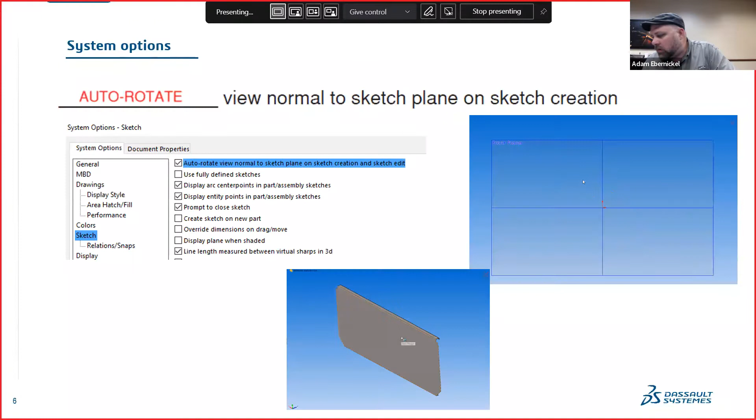The second thing we can do, the numeric input on entity creation, so enable that on screen, and you can see some of these GIFs I've got loaded up and where that's actually at. I'm sorry, we're going to go through this one and then go to the next one, I jumped ahead. So you can see the GIFs.

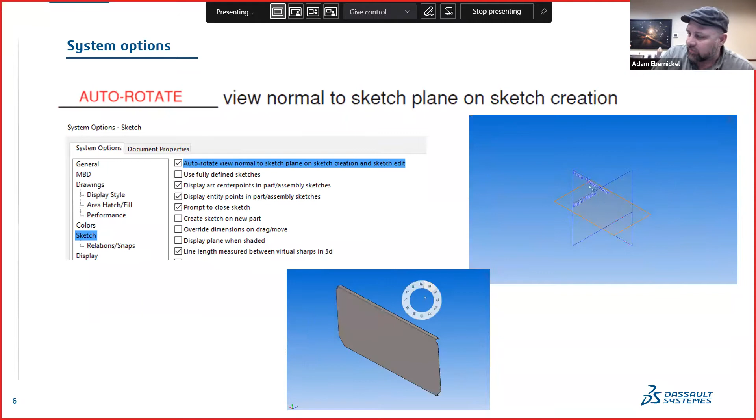Basically what you do is go into the system options, go to sketch, and you'll see the location I've got highlighted blue there. You check that off. What that does is anytime you pick on a plane to draw a flange, another extruded surface, or a cut, whatever the case may be, it automatically rotates that. Now sometimes it's nice to have it in isometric or whatever view you're looking at so you can see where you're going, but on a basic sketch, or if you're just wanting to draw something out, it's always nice to have that rotate for you. So: auto rotate view normal to sketch plane on sketch creation.

The next thing, where I jumped ahead - what's the next thing? Numeric input on entity creation. So you're basically going to enable that on screen.

We'll look at a GIF for that as well.

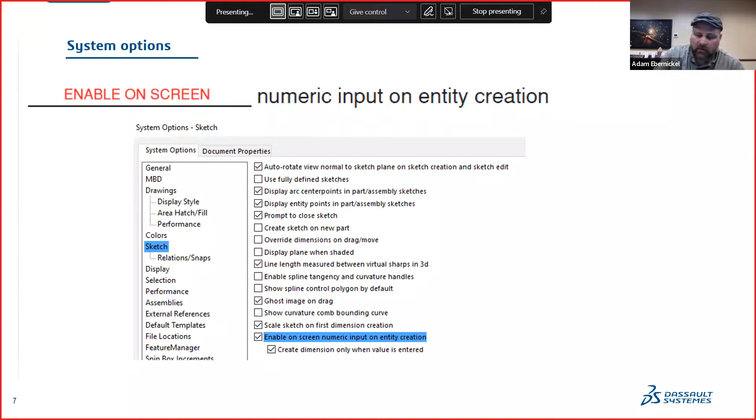If you go into your sketches, go ahead and check those two boxes. You have to check the first one first, and that enables the numeric input entry on screen. What that's going to do is when you go to create a box or a line and type in that value, it's going to automatically input that and lock it down for you and create that relationship or dimension. The next one is dimension, that check underneath it, dimension only when value is entered, and that's create. That was the next box under I talked about in the last slide.

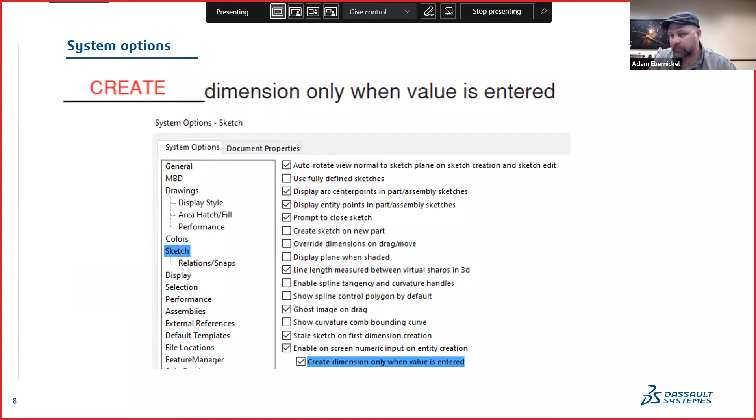Now we'll jump into assemblies. What can help us with assemblies? Oh, I'm sorry, I actually added this one in - sketch snaps. So if you use the F5 key, you can toggle that on and off, and that can help you. I know sometimes you come in and you're trying to snap to a point or draw something and it's trying to pull it somewhere else. So you'd be able to toggle that off and on with F5, or be able to choose what you want to snap to. That can definitely help.

Filters, we'll get to that a little bit later, I think it's on here. Filters is also another power user thing as well. But there's your sketch snaps, being able to turn those off and on and select which ones you want enabled. That's why filters can come in handy, because there may be a point where you just need a midpoint or just need an endpoint and it kind of jumps back and forth. But I'm getting a little ahead of myself on that one.

All right. To the CAD model, let's see.

I'm watching the chat for questions if anybody has any. Okay, yeah, let me know if anybody does.

Minimize this guy up here.

So a lot of these things, and we'll get into more of the system options and how to search things here in a minute, but a lot of these things live up in your system options. So you're just going to click your mouse cog up there, and that's how you will access that stuff. A very powerful tool, and we'll see that later. So when it comes up, you might be able to remember this and holler it out - use your search tool. So if you forget one of these tools today, but you can remember the name or it's on your list, simply enter it in and it'll automatically populate that or give you a direction to go to get it. So that's very powerful.

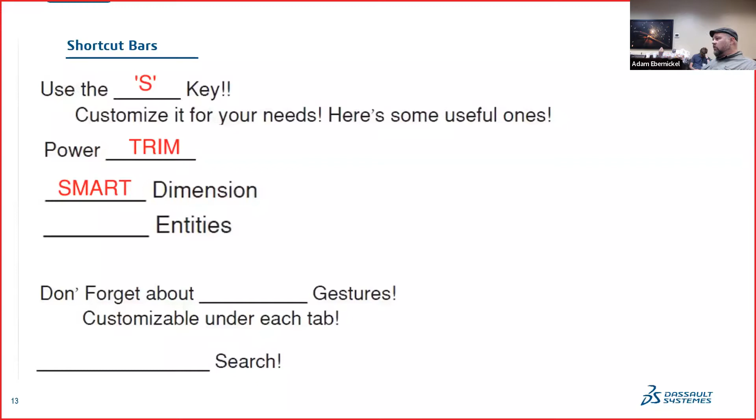What about dimensions? Smart dimensions, correct. Yeah, you guys got that. Smart dimensions are awesome. I mean, if you got something in mind, like ordinate dimension, you got to go pick ordinate dimension or pick it up where you left off with an ordinate dimension. Smart dimension is also great because if you use it right, you can sometimes only click one line versus two lines, right? So it can really be time saving there.

Next one's going to be convert entities. If you don't know about convert entities within SolidWorks, you definitely should. And I think that goes for anybody that's dealing with any kind of sub-assemblies or where they're mating and needing to put bolts through things that have slots, to line up with it. We'll talk a little bit about convert entities as well. There's a couple other here I'll just throw on: extrude, cut, and of course, what I mentioned at the beginning when I was talking to my son, don't forget your mouse gestures.

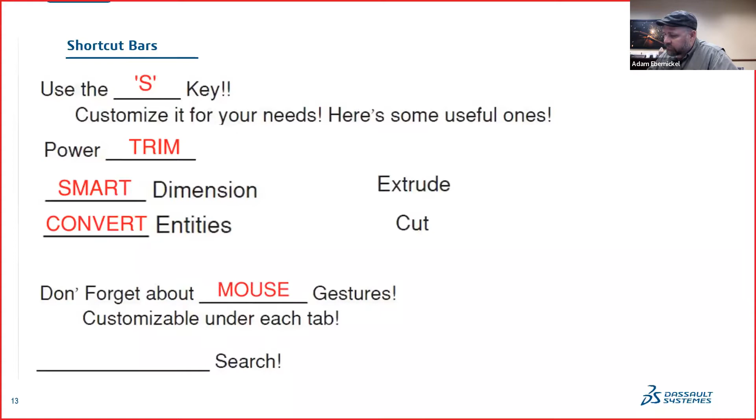We're also going to talk about, hopefully on this list, I think it's on there, saving these things out. And if it's not, we will talk about it. Because once you set this stuff up, you don't want to lose it, right? You want to be able to take it from computer to computer, or SolidWorks 2021 to 2022. You want to be able to take those things with you and not have to recreate them every time. But yeah, don't forget your mouse gestures. They're customizable for each environment.

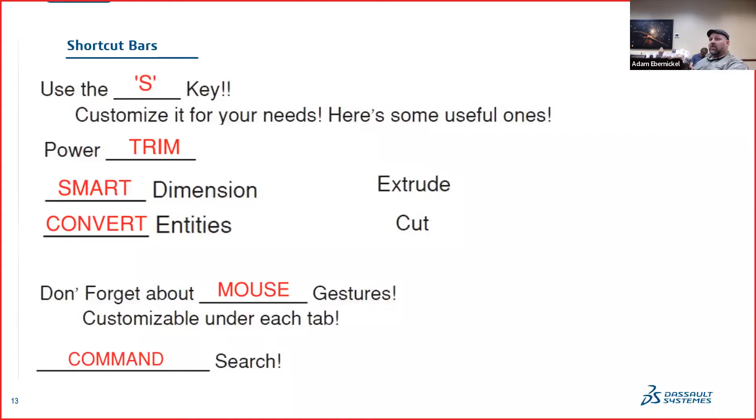And even what some power users do is they'll combine their S key, not search, but their S key, with their mouse gesture. So if they're using 4 quadrants or 6 or 8 or 12, one of those could be your S key, right? Think about that. So now you have a menu inside of a menu right at your mouse. Okay. And command search, huge. If you don't know command search and the powers that it can hold, there's a lot to it. And we'll talk about that too. And back to my display, to the CAD model.

We're going to switch back to the CAD model. We're going to run through these. We're going to talk about the S key first. How do we set up the S key, right? My computer's set up a little different, so I'm not going to try and pull the S key with just the S button because I have completely customized all my hotkeys.

And I'm not going to lie to you, I have a macro pad, which you'll see in a later edition of this week. In one of the presentations, when I talk about peripherals, you'll see my mouse and my macro pad. And so I've got all that stuff jiving with different hotkeys. So my stuff is not even the same.

But what I will show you is as you go in and you right click on the ribbon at the top, you go to customize. And inside of customize, you'll see mouse gestures. You'll also see shortcut bars, right? So if we click on the shortcut bars here, these are the bars that we're talking about. These are the S key bars, right? Where you can add and customize whatever you do.

What I told my son when he called me and he asked me about how do I get to this feature a little quicker? Like I said, he's fresh out of high school. He's just kind of learning how to use SolidWorks on the job as he's going through college. And I was like, dude, whatever you're doing, as you're working through the day, when you have to use that command, add it, put it somewhere, put it on a mouse gesture, put it in a shortcut menu, right?

And these shortcut menus are pretty awesome. They're configurable. You can drag them around. As you can see, I can make it wider. I can make it taller. I can make it all kinds of different shapes. I can move this thing all around if I want to, right?

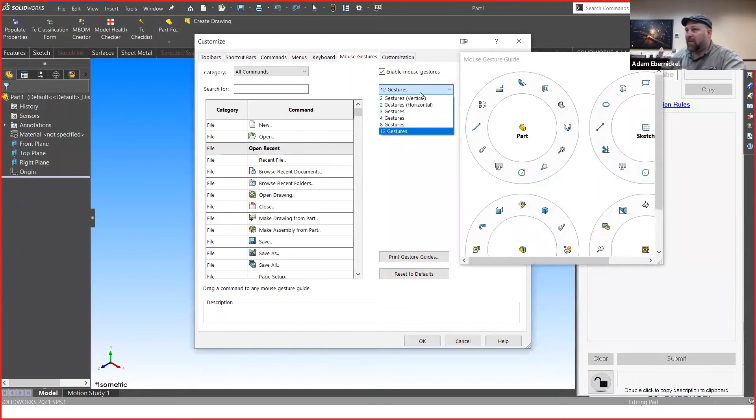Now, when we talk about those different ones, and the ones that should be there, they should either be there or on your mouse gestures. I prefer to put a lot of stuff on my mouse gestures. And I recently bumped myself up when they upgraded SolidWorks. I went to the 12 gestures. I'm surprised they're not going to come out with maybe an 18 and a 20 and a 22, and then we're going to need to use the magnifying glass hotkey just to be able to see our mouse gestures, right?

But no, I did. I went to the 12, and as you can see in my mouse gestures here, I'm going to drag this over for you if it'll let me, and I'm going to make this just a little bit bigger. You can see right there is my shortcut bar on each environment. So I have my mouse gestures set up the way I want to use them. And I did it the same in every environment. Lower left-hand corner of my wheel is where my shortcut button lives.

Why did I do that? For consistency. Because if I can remember it in one, guess what? I'm going to remember it in all the other environments too. So that's what I did there. And you can see I've got some mouse gestures set up. We're going to talk a little bit about those mouse gestures in just a minute. It's the same way. They actually even made it easier.

Back a few iterations ago, a few years back, you actually had to go in and hit a drop down and tell it which place you kind of wanted it. Now they made it even easier, just like the shortcut menu. I could take it off. I could put it on. I grab it from over here and put it on, right?

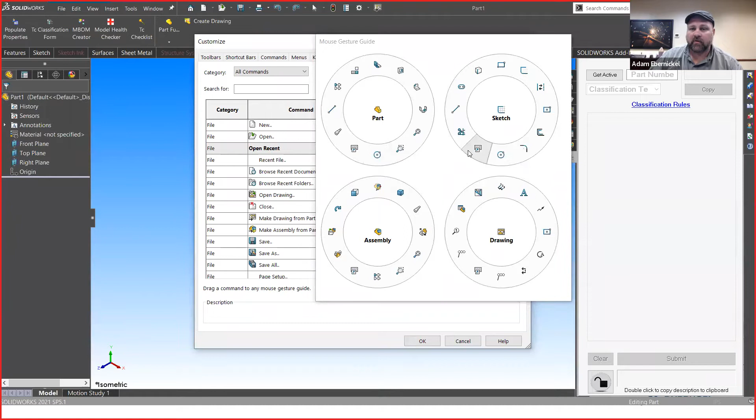So that's just very powerful to be able to use those mouse gestures, because I'm sitting here in this part environment, getting ready to make a part, and I'm going to go ahead and let's go isometric. Get that command manager up there, or command search in just a second. So I'm in isometric here, and I select the plane, and I come over. I say, oh yeah, I just need to put a flange on that. Let's go ahead and just draw this guy out, grab my line,

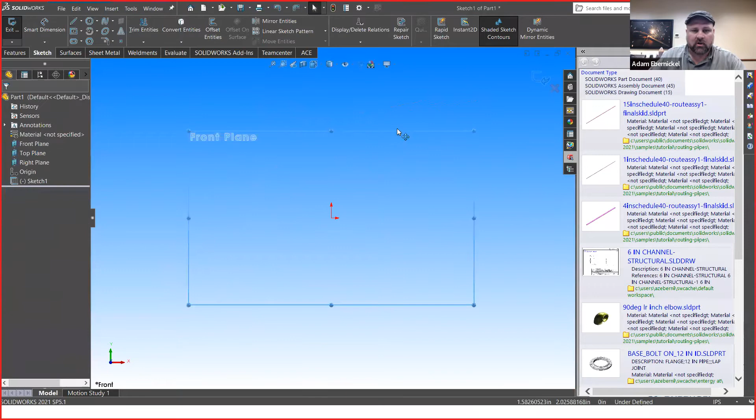you know what I mean? And notice what I did there. I actually drug those out. I held the left mouse button down. So let me go ahead and undo that just so you can see that again while I'm doing it. I might as well explain it. So if you hold the left mouse button down, notice what happens. It drags with it, and the minute I let go, it drops it, right? But if I just click and pull, it's going to actually go until I click the second click, right?

So that was super easy the way I did that, though. I clicked the plane, I used my mouse gesture to the right-hand side, automatically pulled up my sketch tab, and then went right in, did my mouse gesture to the left, and I was able to pick my line and then run with what I wanted to do. But think about that in every instance that you do. Think about every command you do to be able to do that, how much quicker that is versus running over here versus coming up here. Right. So that's, again, mouse miles. We're reducing those mouse miles.

All right. So I'm going to go ahead and exit out of here. All right. So exiting out of here, and I talked about that command search. That command search is awesome, right? I'm going to go ahead and unlock my toolbar. For you guys here at Altec, we as IS and as modeling standards team have chosen to lock your command manager up here at the top, your ribbon.

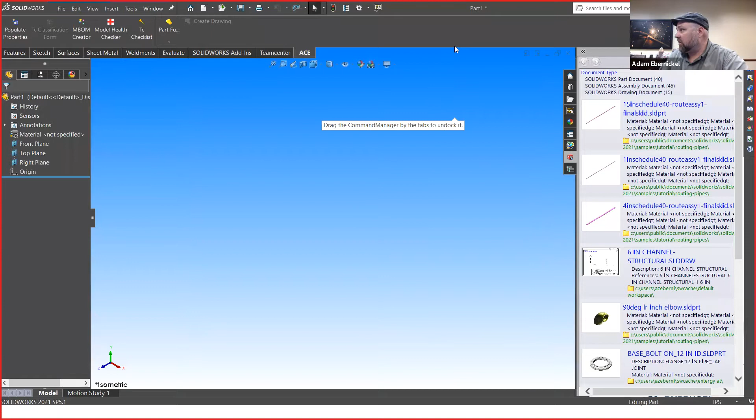Reason why we did that, and I'll go ahead and unlock mine. You're more than welcome to unlock, and I always keep mine locked, because a lot of people drag that thing off and it'd be gone, and they get with Brad or me or a local champion and say, where did my ribbon go? I can't figure out where it's at. It's gone. So we just decided we'll just lock everybody's down. Nobody's going to go missing that way unless they purposely do it. And if they purposely do it, they probably know how to get it back. So yeah, if you're wanting to modify things up here in your ribbon, which I'm gonna get to just here in a second, go ahead and unlock your command manager, your toolbars, and that'll help you with that.

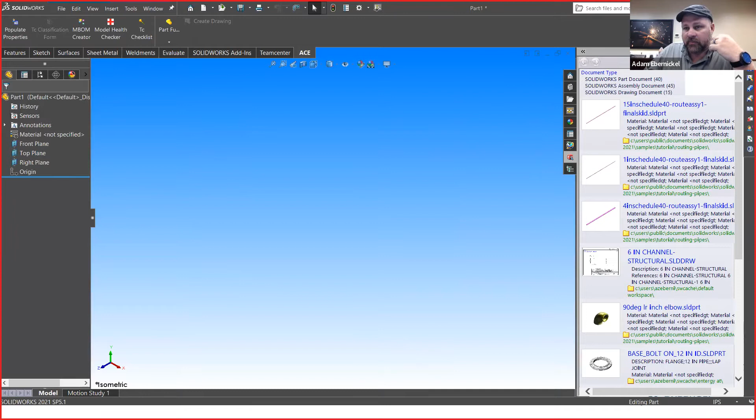The reason I say that is because up in this top right-hand corner where it says search for files and models, it changes from time to time depending on what you used last, or how it opens. But this command one, this is awesome. Why is it awesome? Well, let's say I use the mirror key quite often, but dadgummit, I can't remember where that thing lives. How do I mirror something? So I could just come up to command search and go mirror, not even type the whole thing in, and you see it's right here.

Now it is grayed out. Why is it grayed out? Because I don't have anything to really mirror. So it's understanding that there's nothing there. So instead of that, let's use something that is there. Let's do extrude. Okay, so we've got extrude here, extrude boss.

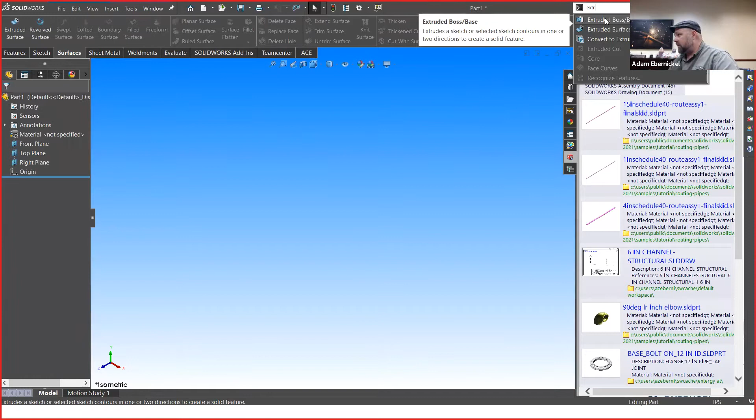There it is. I couldn't figure out where extrude boss is, but now imagine this is anything else besides that you may be looking for. Right there it is. Now I can click that and go ahead and execute that command, right? If I click it, the command starts, it's initiated, and I can go ahead and start using that command. But does that help me any? Because the next time I'm probably gonna have to go up there and hit it again, right? Well, what if I want to know where it's at, right?

So let me go ahead and shift this over just so we can see what it does. So if I hit that, it's going to execute it. But if I hit this little eyeball over here, watch what it does then. I'm not doing nothing, hands off. Look what it did. It showed me where it was. Now I know where it lives.

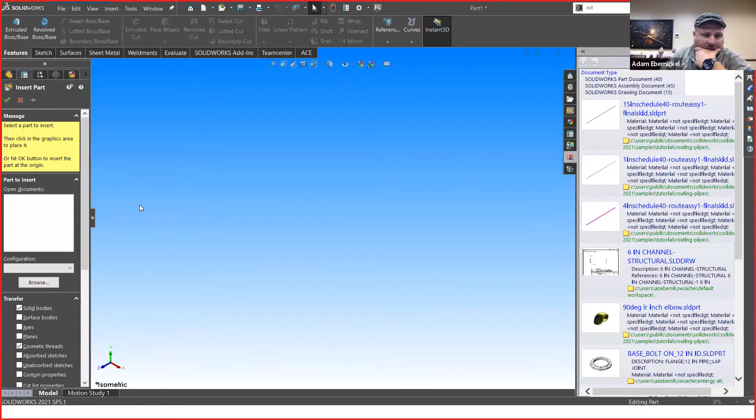What if I wanted to create a new part, a mirrored version of that part, right? And there's a way to do it, but you can't remember. And I know it lives in tools up here. Let's see. What am I looking for? Insert. I'm sorry, not tools. Insert part, right? We want to create a new part. So is that right? No. Trying to look for something. We're going to use the command search to find it.

Of course, you have a brain fart while you're in the middle of it.

Point being, anything you're trying to look for, if you can remember some of the name for it, you can type it in that command search and navigate to it. We're going to take it one step further, right? This makes command search even that much better. What if we're going to use extrude again, just for simplicity? We hit extrude boss. We know that we can click it and execute the command. We know we can hit the eyeball now and it'll show us where it lives, even if it's in the tools menu, right?

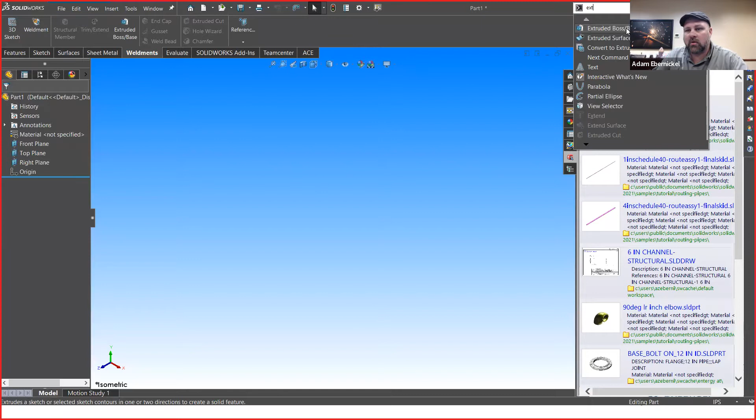But what if we want to use it all the time on a certain ribbon that we're always on? We'll grab that guy, pull him off of the command search and drop it. Now that button lives where you put it, right? That's big. Now, how do you get it off, right? I accidentally put it on there. I want to get it off, right? We'll just go to customize again, move this window out of the way. We'll grab it and we'll just drag it off and get rid of it.

But where that makes that so much more beneficial, move my zoom window out of the way so I can see here, is we can come down here and we can make a new tab. And when we make that new tab, we can call that Adam's tab or Jeff's tab or my drawing tab or whatever you want to call it, right? You can build a tab customized to what you want. And how do you do that? You add those commands to it, just off the commands there, or you can drag them all off the command search bar and build it how you want it, right? Let's see, I just covered all that stuff. Yep, okay.

Alt tab, let's go to the next section. We're going to talk about some different tools here, some sketch tools. Bringing the confirmation corner to your mouse button. Who does that? Do you guys know what that is? What key does that? It's part of breadcrumbs, kind of, yep. It's the breadcrumb button. You know what key that is? D key, correct. Yeah, we had an answer in the back of the room, and who knows, you might get an extra t-shirt or something. So yeah, the D key, right?

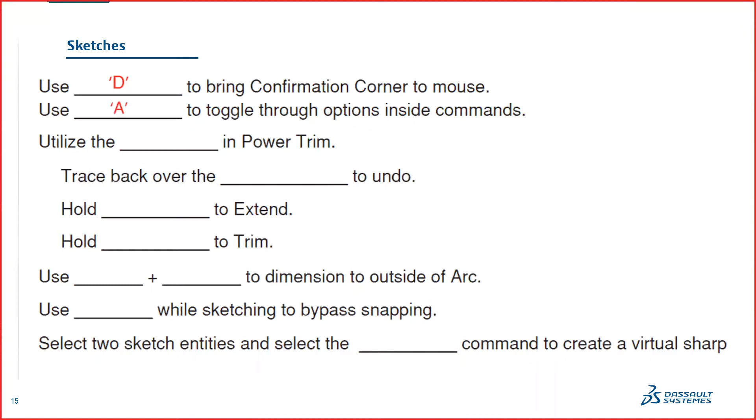So let's say you're in the arc function, right? Or the circle function. There's different ways to draw a circle. You can do the center point out to the radius. You can do a 3-point, all these different ways, right? Well, those options are in the command menu on the left-hand side of your viewing window. And so if you're in the middle of your screen, you can hit that A key if it's not on the right one, and it'll actually toggle between those functions. That's pretty neat.

Utilizing the blank in power trim. This is kind of tricky. So utilizing the power in power trim, right? We're going to talk about power trim here in just a minute in this next SolidWorks setup. So utilizing the power in power trim, and why is it powerful? Why do we utilize that power? We'll talk about a few functions it's got there.

Trace back, okay, and we're going to actually talk about these functions now. So trace back over the blank to undo those things.

So if you're using the power trim button, think about this in your head, because we'll get to SolidWorks here in a minute. You're trimming through a bunch of stuff at once, right? You draw that line across all these other lines to trim them off. How do you undo them without going back and hitting the undo button? You trace back over the...

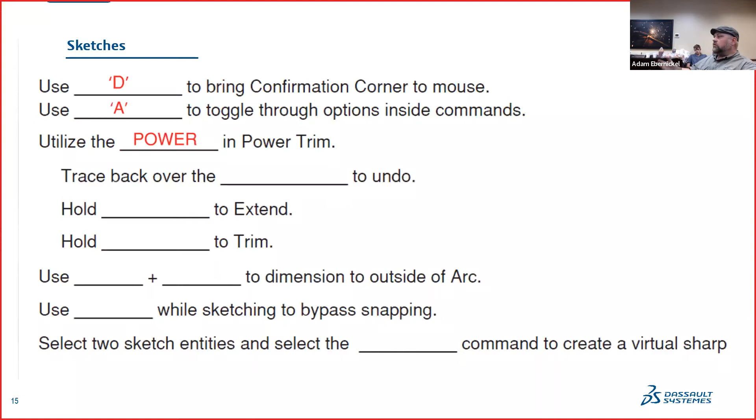Now, let's say you're in power trim, but all of a sudden you need to extend. Do we need to hit escape and go hit extend? So hold down the blank to extend while you're in power trim. What do you do? Control. Shift. Shift. Yep. Shift, correct. So we had an answer of shift, and shift is the correct answer.

Hold down the blank to trim. Control.

Use the blank to dimension to the outside of an arc. Imagine this, guys, and I know we've all ran into this. We've got a slot sketch, or we're in a drawing and we're trying to dimension to the outside of the slot. We know we want the overall slot to be 1 inch, not center to center, overall slot. But every time we go to pick it, it always wants to come to the center, right? It never... Shift left mouse button. Yep.

So use the blank while sketching to bypass snap. This is huge. This is another one that goes along with what I talked about a minute ago with the filters and the snap, turning your snaps on and off. This will actually help you turn your snaps off momentarily, so you don't have to hit the F5 button to turn your snaps off. You don't have to adjust your snaps and filter if you just need to wing it. You can hold the blank while sketching to bypass the snap. The control key.

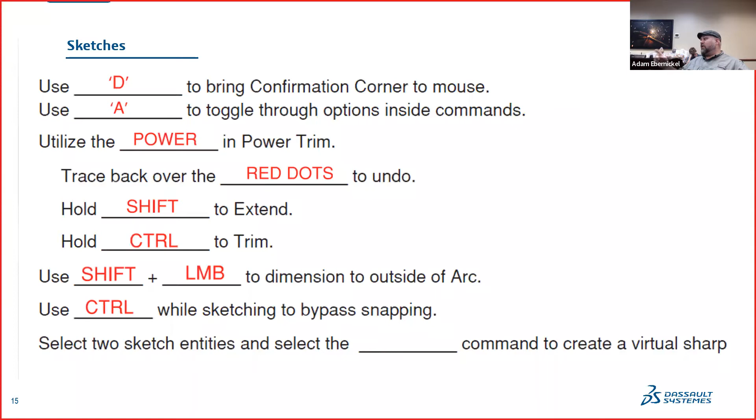Virtual intersection. Theoretical point. Theoretical point, yeah. So when you select two sketch entities and select the point, the command will create a virtual sharp.

Dustin says, just kidding. No, it's not. Yeah, it is too, because he made me look it up.

All right, here we go. Demo time to the CAD model.

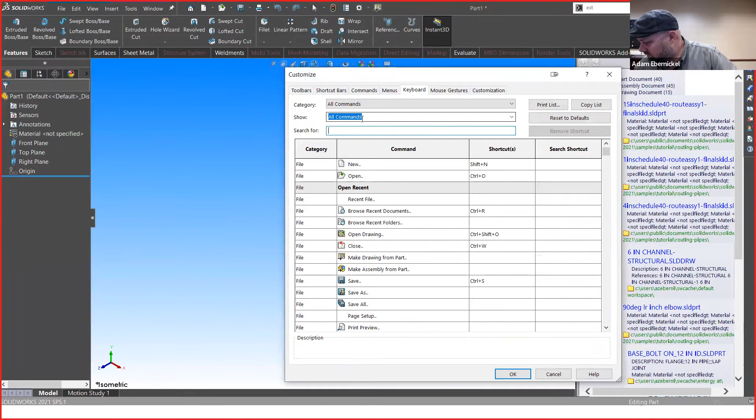Okay, using the D key. Let me make sure I know which one mine is. I think it's maybe the R. I'm just going to make sure before I do it. Okay. Yeah, that's what I thought.

Okay, so we're going to go here. I'm going to use my mouse gesture. I'm going to say I want to extrude a tab. I'm going to give a line to it. And I'm just going to say I want this guy from here to here and then from here to here. I'm not going to give any thickness.

And I'm going to come over here and hit that. Instead of the D key for me, I'm going to hit the R key. See how that brought that down there? Think about how much time that saves instead of coming all the way up here. What if I was zoomed in on something down here in this corner? I hit that D key and bring it right to me.

I can go ahead and hit that and come right out. That's with extrudes, that's with cuts. There's a lot of functions where you can bring those accept and decline buttons to your mouse, so you don't have to go chase them down. That's pretty powerful. The A key to toggle. Let's do this.

So we'll come back into that. Get out of here.

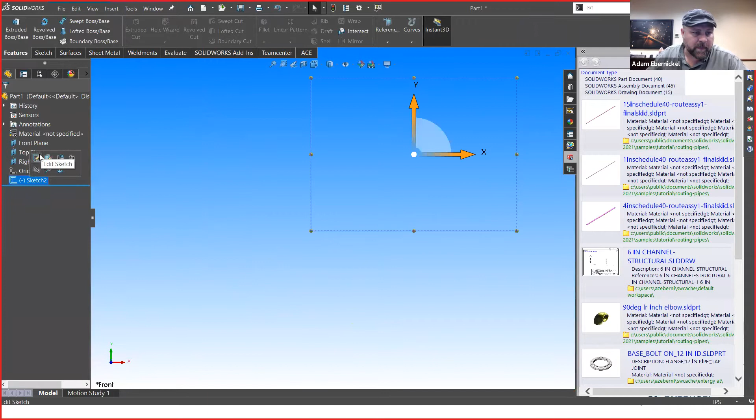Okay, so if we run in and grab our arc point here and hit the A key - mine's not doing it because my hotkey has changed. But in theory, if you haven't changed your hotkeys, hitting the A key is basically going to cycle between these. That's what it's supposed to do.

All right, let's talk about that power trim. I'm just going to draw a bunch of lines here. We're going to go through this power trim feature.

I keep my power trim, guess what, right there. How do we access the mouse gestures? In case anybody doesn't know, we know how to create them. Hold the right mouse button, correct? Yeah, we talked about how to create mouse gestures, but how do we activate them when we want to use them? We hold down the right mouse button and drag over the quadrant we need.

It's funny when that was first introduced, because we had customers accidentally doing it - like, what the heck was that? They couldn't figure out how to just do it. It's really cool. To go one step further with mouse gestures, hotkeys, and shortcut buttons, if you have a space mouse, you have an extra set of mouse gestures you can utilize. So that's something cool you can research. The space mouse actually comes with mouse gestures too, so you can have mouse gestures for your mouse gestures for your space mouse. That's interesting.

All right, so I've activated the power trim feature. I'm going to hold down my left mouse button and start trimming away here. What is that leaving behind after each time I trim? A red dot, yeah, a red tag.

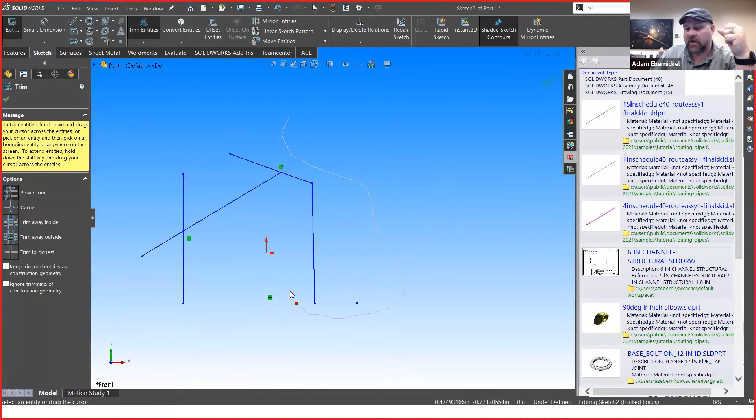So we talked about how I could easily let go and say, dadgummit, I'm going to have to go back and undo all that, and retrim what I wanted just because I screwed up at the last minute, right? So let's look at it this way. We got the red tag - if we trace back over the red tag, it'll pop up what we just did, so we don't have to undo everything at once.

As we're doing that, if I was in here trimming a bunch of stuff and decided I actually need to extend this guy, I can hold the shift button down and just extend without doing anything else. And then back to control, holding control to actually cut it off again.

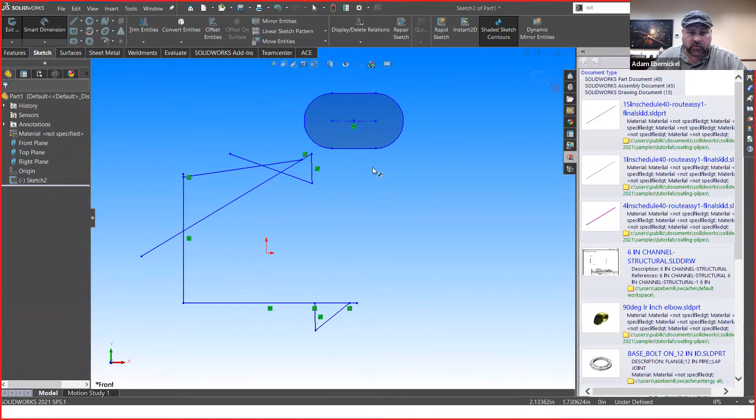The arc we talked about - let's say we draw a slot here, and it's pretty good on sketches doing it because it'll click here. But if we were in a drawing doing it, if you just hold down that shift button, it will automatically select the outside of the arc. You can see how it did there - I didn't even have to go to the point. Just holding it down and clicking on that radius, it's automatically trying to deviate back out to the end of that slot. That's pretty cool too.

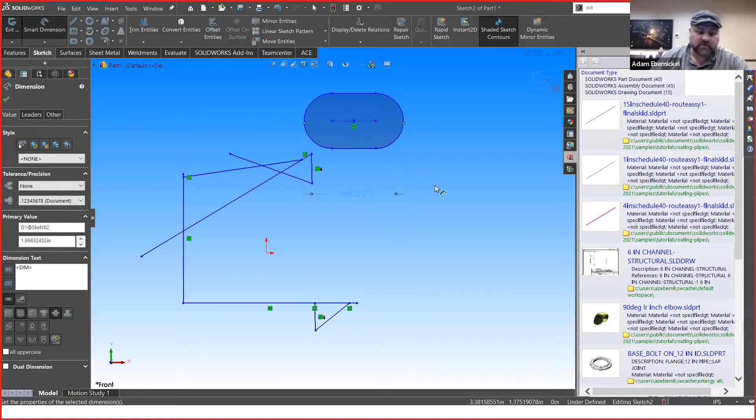Let's look at the next one we were talking about, which is holding control to bypass the snaps. We come in here, and I'm trying to come up here - dang it, I do not want to snap to that center point, but it's going to make me. I want to come up off this edge, but look, if I come up off the edge, it really tries to go to the center point. Let me undo that line and try it again - it's trying to pull up to here. But if I hold down that control button as I do it, it's actually not going to allow me to snap to anything, and I can just put that line anywhere I want. So it completely bypasses the snap.

Selecting 2 points for a virtual sharp. So let's look at, just going to draw here, put this little arch.

Notice I went back to the point to draw that arch. That's another kind of tip and trick, right? I'm gonna come off here, and I need to know where, so in theory, with the theoretical point, you need to know where that's at, because that's how you measure off of it. It's hard to pull a micrometer off an edge and make sure you're perfectly on the point you need to be at. So if you can draw 2 points, 2 lines where they intersect to that point, then you can actually make that measurement and know if it's correct.

And that's how you would dimension it if you were on the floor, right? So you would actually just grab the 2 different points here, or 2 different lines, and set that up.

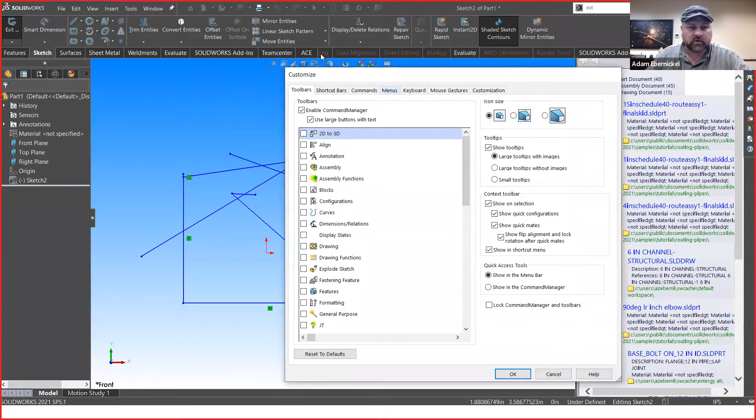Now you can make this in different forms and formats just by coming up to your options - it's under document properties, under virtual sharps, and you can pick from different ones. Whatever suits your boat, float your boat.

All right, let's move on. We're going to go to double click - what to zoom to fit? Middle mouse button.

Make use of what, when applying fillets, chamfers, etc? This is a little bit different - that D key, what do you call it? Breadcrumbs. Use of breadcrumbs when applying those fillets, chamfers, and etc.

It's really handy to use breadcrumbs when you're in large assemblies. And why is that? Because you can click a part in a large assembly, bring the breadcrumbs to you, and filter all the way from that large assembly through its different sub-assemblies down to its part level, down to its initial extrusion. You can grab planes of that part. A lot of times you'll have to go in and expand out a part to find a plane to mate to. Well, if you use breadcrumbs, you can do it from there, and you don't have to dig into your feature tree.

Press the key to show the view orientation dialog box - space bar. So basically you guys probably all use this, you're just not used to that terminology. But when you hit this button, it basically shows this little box around your model so you can pick different ways of turning the model and viewing it.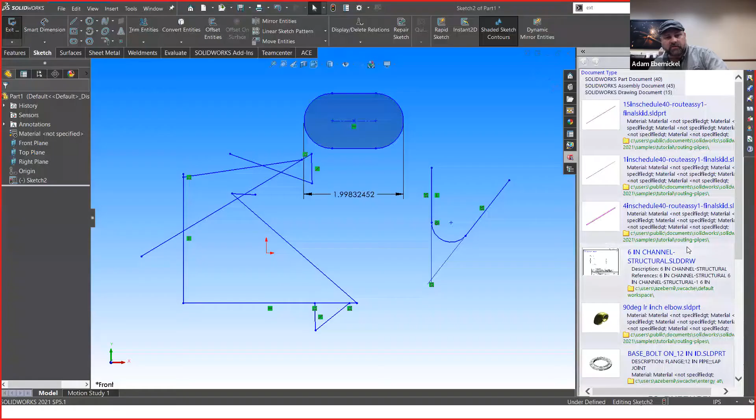All right, let's see if I need to click some of this. If I'm zoomed in here, we're going to talk about middle mouse button double-clicking. See how that came right back out? That was super quick and easy, right?

The breadcrumbs - we talked a little bit about breadcrumbs. Let me see if I can pull up something that's not too complex. Let's just do this. This is a government project, guys - keep your eyes closed. All right.

So we're going to fit that. Also, the F button is going to do the same thing for you - it's going to zoom off. So remember the F button, or fit, is a great one to have as a hotkey.

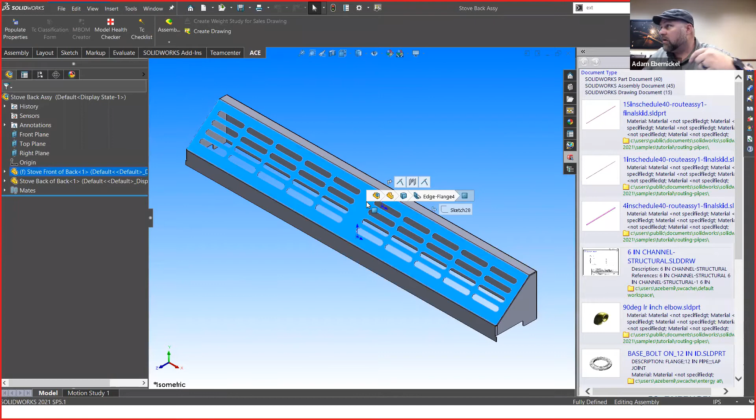If I come in here and I have these breadcrumbs up in the left-hand corner, look at that. If I hit the R button - in my case, D button for you guys, D is breadcrumbs, ignore my R - it brought it right down to me. Not only did it bring it down to me, but it allowed me to select it in the assembly and part level as I'm building the body, building the flange, and it even gives me the sketches in relation to that.

But when we come back to the part level, notice I have these planes - that's where I was talking about. Instead of digging into the tree and finding the plane you need to mate to, it's right here. All you got to do is click the part and use the breadcrumbs and it's there. Forget digging in the tree. So that's your breadcrumb speech.

Pressing the space bar right here - let's see.

I must have mine set up a different way, but this is good too for orientation because you can actually select it here. Most of the time it'll bring up a box, and I've got mine set up different. Inside of here, and I'll go ahead and add this in because I don't think it's on. It's going to be a bonus. Hopefully I don't have it in my next tips and tricks for advanced tips and tricks, but you can create new orientations. You can rotate these things around.

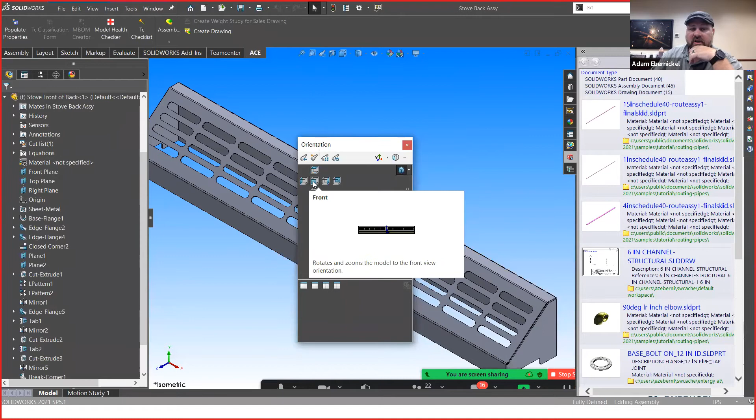If there's a specific view or a specific, say, section of your model you're working on, you can create views within this that you can automatically click and come back to every time. So there's a lot of cool tips and tricks within that as you work on this too. You can also reorganize these views. You can change your front view to be your back view, right? You can come in with these buttons up here. You can do that. And then if you ever get too far into it and you screwed all your views up, just go in there and hit reset. You can take care of that and come back to normal again.

Offset planes. Let me go ahead and turn my planes on here just so I can see them. Talking about offsetting planes here. And I actually did this in this model. I actually did a couple of offset planes here because in this project I was working on at the house, this is a vent for an oven, right, where it vents out the back. I didn't want it to hit my backsplash, so I was trying to vent it out more forward. That's what my goal was for this. And I needed to know the overall size. What did that fit inside, right?

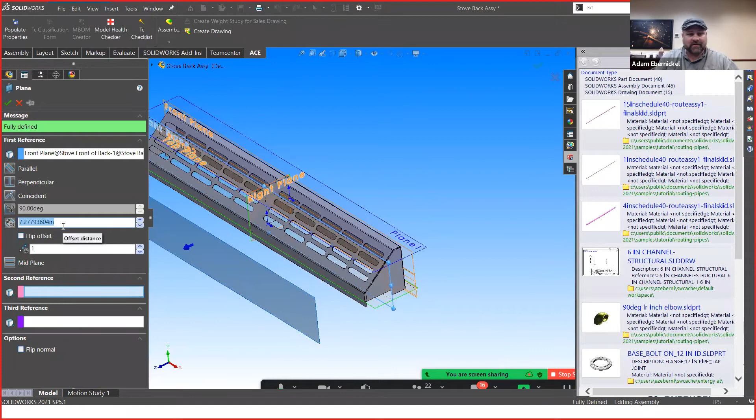So what I did is I came in here, I clicked the mid plane that I had, and I grabbed it, and I went to pull it off. And I said, okay, now I know it needs to be between A and B, right? I went ahead and pulled it off. Well, now I can go ahead and enter that dimension. As you can see over here in the blue, I can enter the dimension and say, I need that to be 7 inches off. And now it just hit 7 inches off that center plane, right?

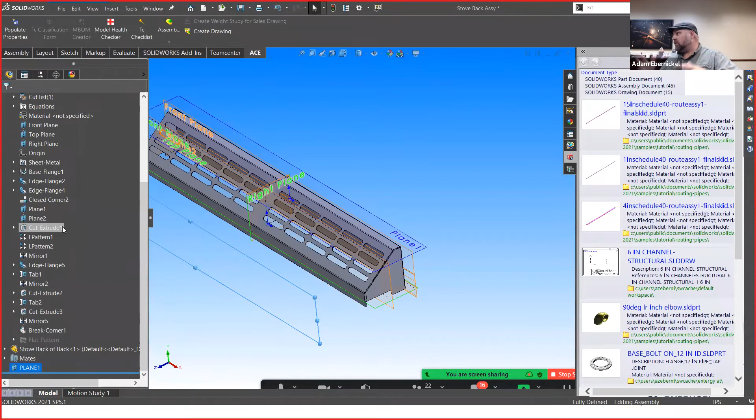And so you can do that with all planes by dragging them off, and not only with planes. I don't think I have it in the rest of it. You can do that with components. It's just holding control and dragging things is kind of infinite. Like there's so many possibilities with that, right? Just play around with that and use it.

The next one, two-face reorientation. All right, so let's say I need to put a relief in the back of this for some reason, right? But I know I need it to be up top. Well, if I just hit normal to, which way's up, which way's down, right? I don't know. I just lost it. But if I come out here and I hit this one first, like you've seen, and then I hit control. Control is a trick I didn't mention. Hold down control. Hit the top, because now I know where the top's at. Then I hit normal to. It locates it that way.

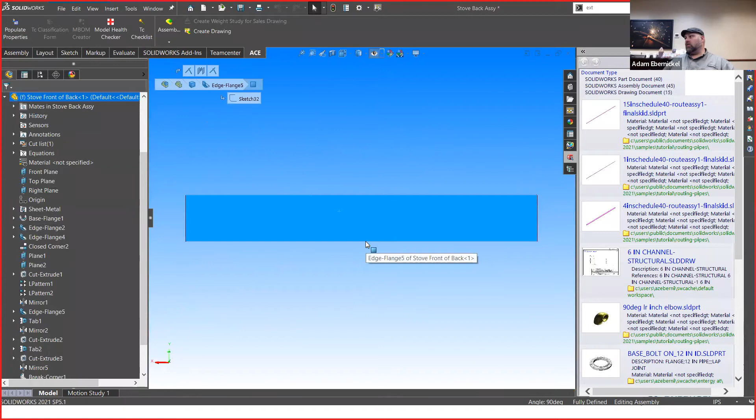Well, how do I know I didn't pull wool over your eyes and that was just the same way it went a minute ago, right? So let's try something different. We'll click here, and then normal to. The second face you pick, and it can be a plane, the second face you pick will go up. Okay.

Rename features in the feature tree. That's as easy as clicking on it and hitting F2, just like you would a file, or clicking on it slow and then clicking on it again, rename that, whatever you want to do there.

Hide all types. Let's go over here. That's a good one we can try and find. Hide all types. Where does that live? It's under view, we know that, but if we didn't know that, it even went into the menu and found it for us.

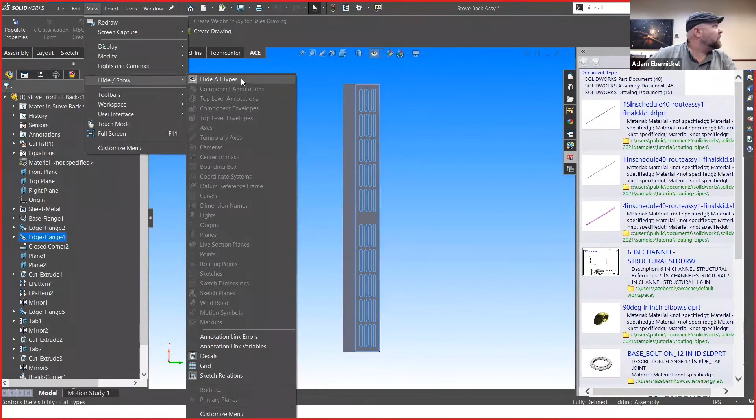Poke the eye to blind it. Huh? Poke the eye to blind it. Or poke the eye to unblind it. Yep, poke the eye to blind it. I like that.

Let's hide all types. Let's jump back into presentation. Let's go over the last few. Hold blank when dragging an object to enable smart mate. Alt, yeah. Hold down alt.

I don't know that I have anything to demonstrate that with right off the cusp, and I don't want to run over too much time because I know Brad's getting ready to jump up. So we're going to speed through these and give him his due time. Take your time. Take your time. Brad says, take your time.

Next one, press blank over an object to hide it.

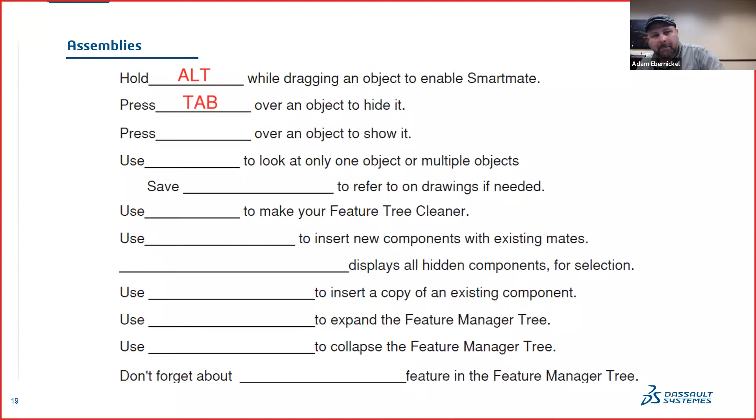Press blank over an object to show it. Shift tab. Correct. Use blank to look at only one object or multiple objects as needed.

Isolate. A fun fact about isolate is, and this is just after using it for so long and just being nosy, isolate doesn't do anything more than hide everything besides what you selected. So if you hide everything and then you come back and say, oh, I needed that floor or that wall or whatever to show up, just go and hide that one. Or better yet, use shift tab.

All right, I pulled that up too quick. You got that as a freebie.

Save display states to refer to on drawings as needed. That's what we were just talking about a minute ago when I said you could create these new views. If there's a certain view you need to look at all the time, save that as a display state.

This isn't on there, but it relates to that: when you make a part transparent, oftentimes I need it to be transparent and I can't get in a position to select it again. Hold down shift. So what happens with transparent is because it's transparent, if you got, say, a bunch of parts behind that transparent part, it's automatically defaulting, saying you want to look through it, you want to grab the part behind it, right?

If you rotate it and put it to where all you see is blue, the viewing window, then it'll let you click it. But instead of going through that much trouble, if you just hold down shift, then you're able to click it. It'll stay transparent, but it'll allow you to click it. Yeah, until you set it as untransparent. Yep. Great point. That's a good one.

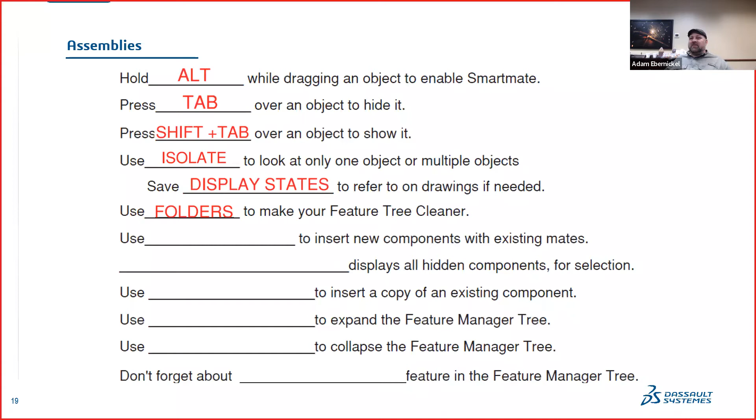This is what you do to somebody that's an enemy, right? You walk over to the computer, you go in the search bar of the feature tree and you hit the asterisk button. Watch their top level assembly in the feature tree. But now on the flip side of that, once that's done, how do you become friends with that person again? Tell them to use Shift C to collapse it. Collapse everything. And don't forget about the blank feature in the feature manager tree, the search.

I'm not going to show all this, probably just kind of show. So this is a search. You can search part numbers. Hopefully everybody knows that. If you hit the asterisk button, it's going to expand everything down through there. If you got stuff expanded, I'll just expand this one. You hit the Shift C key. Notice it kind of minimized everything for me there. Expand it back out. Asterisk.

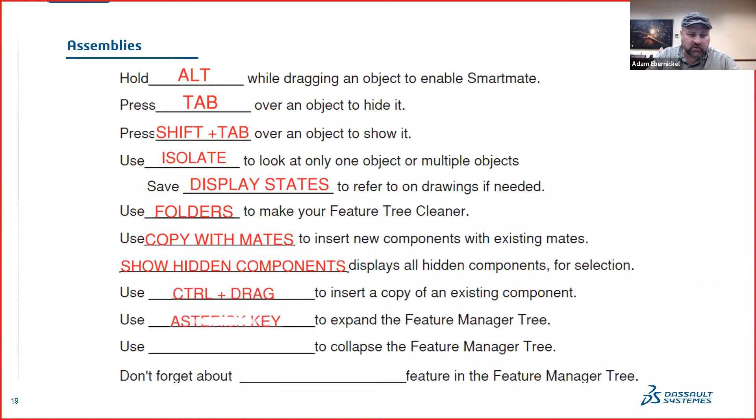All right. So that's pretty much it for my presentation. Let me fill these in for everybody so you guys can see those. So some notes to take away from today: check out and use the search in your system options if you need to find something. Shortcut bars and menus can reduce mouse miles. The D key and power trim can help you flex. Organize and name your feature tree.

So my call to action is to give it a try. It's just one thing, give it a try. Where will you start? And practice doesn't make perfect. I always like to remind people it doesn't make perfect, it makes habit. And Aristotle actually said, we are what we repeatedly do; excellence, then, is not an act, but a habit. Okay. Are there any questions?

Where do you export settings, like all the settings? Not just the mouse gestures, but also the system options, and can you carry that to another? Yes and no, it will for sure. You can select that in the system options. And I know I didn't talk about that. I said I would. It's real quick. You can just come in here and go to your SolidWorks tools. Usually you have to have SolidWorks closed, especially when you're re-putting them in.

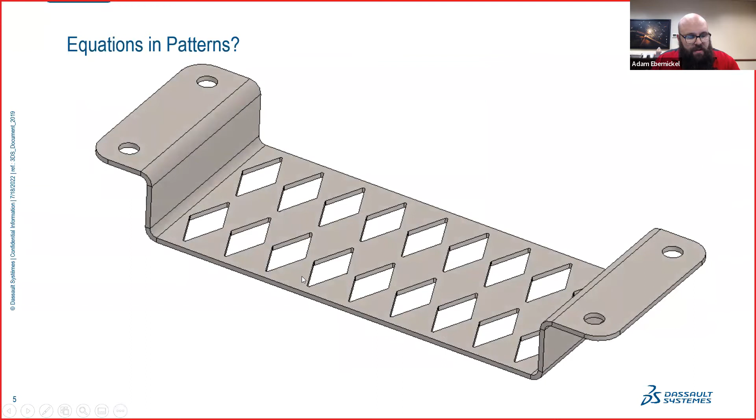So let's jump over to SolidWorks here. Where'd it go? There it is. Nope, nobody can see it. There it goes. All right, can everybody see everything okay? Sure can. All righty, awesome, Brian. So we will go to desktops. All right, so

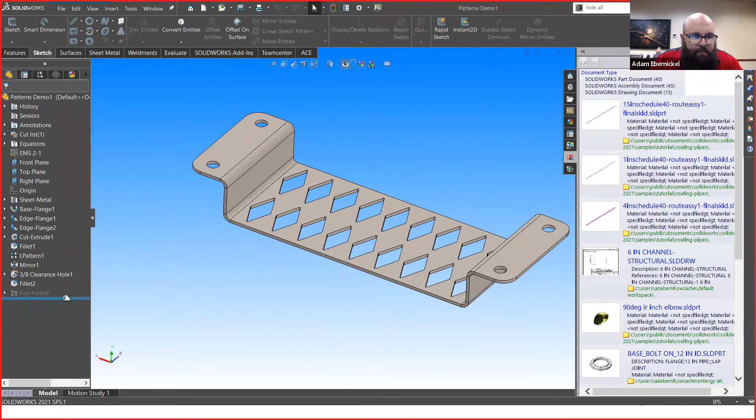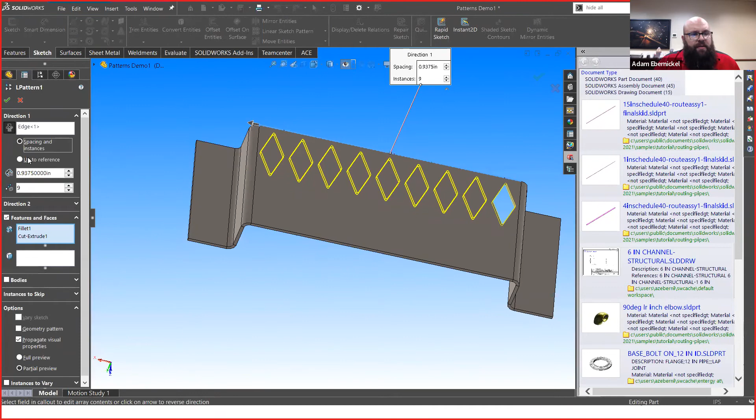All right, so I know we have a lot of sheet metal users in here, and we have a lot of advanced users. So we'll go over some stuff here. We know you can use linear patterns as normal. You know, pump down a certain amount, give yourself a little bit of breathing room. Well, we call that the spacing and instances setting inside of your linear pattern. So, you know, I want 9 or I want 10 in this grated area. Well, you could set that. Well, you can also do calculations. So we can come in here and actually set patterns. We can add them.

Stuff is all backwards from me.

We can come in here and use all of our predetermined sketches and dimensions, creating dimensions using equations. We can always add global variables, functions, or custom properties - like the thickness of this material, or making sure your bend radius or laser doesn't cut too sharp of a corner. We can work with any option here and get your functions, as well as basic arithmetic.

I say basic, but arcsine and tangent and stuff is far from basic for some people. We tend to overlook these options - at least I do in my day-to-day. We can rush through our tasks to get them done as fast as possible, so you don't quite understand what you can do inside the part.

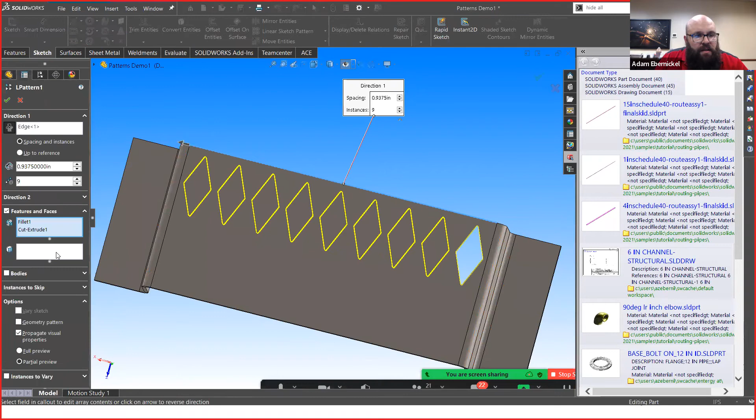But if equations aren't your thing, you can actually set - I want to go up to reference, this is another option here. Part of being colorblind is I can't see things when it's up there. So we'll go back into our option here, and we're going to set this part up to reference.

We know that we want to have this diamond evenly spaced across the part, and we know we want it spaced every 1 inch. We want it to be up to this reference plane here, and we want it offset by a certain amount. We can change it - if we want 1 inch, 2 inches off the part, or increase or decrease the spacing using your options here.

So when you come up inside your part and decide you want to change the length...

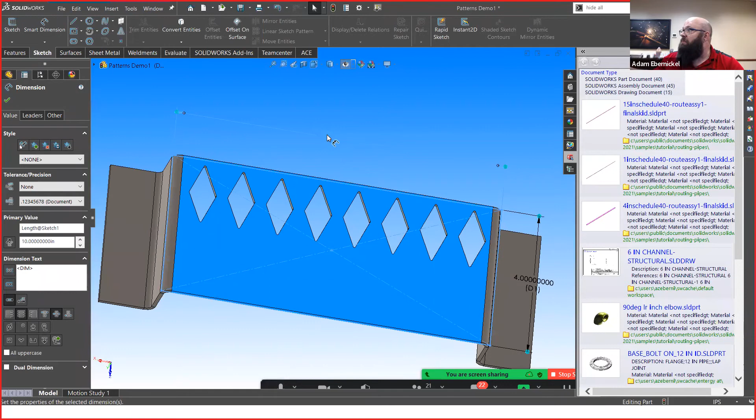Do you know what the rebuild function is for a single command, for a single change? Control Q? No, close - Control Q rebuilds the entire part from top to bottom. Control B? Control B, yes - Control B only rebuilds what you were working with. All right, never mind, not on Adam's machine. So Control B rebuilds it - the premise of it being a different beast. Yes, I see that, so we'll do that again. We'll do Control Q, and let's hope he doesn't mess with it again.

And we can set the number of spaces out equivalent, or set per the width of your part. Now, how many people have messed with that before? One, two, three - okay, good.

All right, well I'm going to show you a different one. Have you ever heard of the fill pattern? Fill - okay, we got a couple. You can also do that as well in this area. This is a new one to me.

I'm still learning this one, so it might not work out as intended. We'll work on this thing here, and we'll go - yep, and it's telling me I can't be patterned. So we're going to try to shrink it down and set our target spacing to where it gets to fit in.

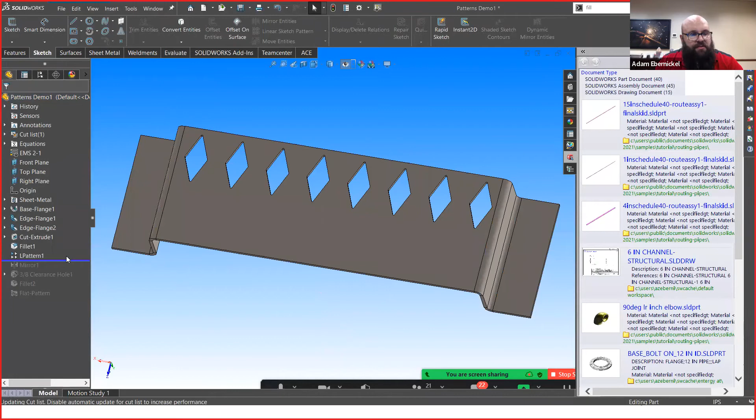Okay, so that one we'll kind of skip for now. That's one I'm still learning and playing around with. If you have specific questions on fill patterns, I'm looking at doing another presentation just on that for sheet metal grating and whatnot - we're just exploring that with some new people.

So far, any questions on equations or using the up-to instances and things? Anybody actually want to play around with that? Please try it, and always feel free to ask questions - there's no dumb questions.

When it comes to usually an equal size, right? Yes, balance your pattern - yes. If you've got holes or bolting, it works great for that, but if you're doing anything aesthetically... it's better than having to find the length of the part, divide it by 2, figure out the gap between the side pieces. It allows you to accomplish your job at a faster rate without having to sit there and do the math or input the equation inside of SolidWorks.

We all know we have different users, different levels of users, and they always come back up. New users can come back into a part and they can't modify it - they won't know how to modify that pattern instance as easily when you have equations. I get questions all the time about equations because it's just not something many people use, so I tend to stay away from them and use this up-to instance instead.

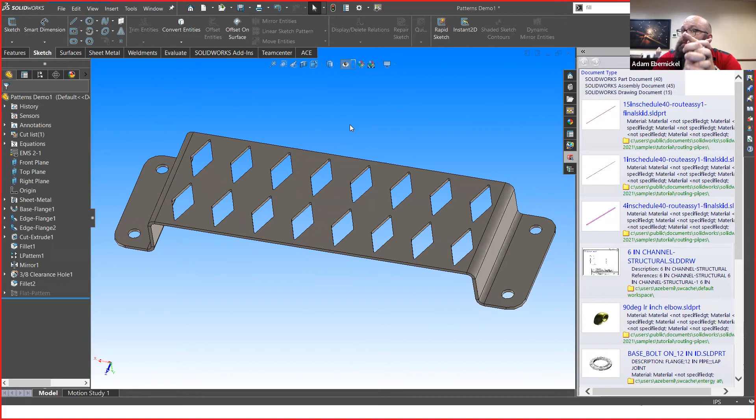Your mileage may vary, of course, but we can always test this. Do you think the up-to instance eats more resources? I remember when we put slots in shelves, it seemed to eat the resources. That is something we haven't tested yet.

I would assume it probably does, because it's constantly in flux compared to something with an equation that's preset. SolidWorks likes things to be fully defined. It actually thinks faster when everything's fully defined, instead of leaving options for flexibility. So I'd assume it's a little faster that way. That's why I like to use the full pattern option rather than just pattern row and mirror. It speeds up the process a bit and gives you more flexibility inside the parts.

Looks like we got a question. Oh, what did he ask? So the question was: does the up-to reference increase your file size, or is it more resource intensive?

Like I said before, it probably is, because SolidWorks doesn't like to have things in flux - it likes things fully defined. That's why, if you've ever listened to Toby's fully defined song, go do it, it's great - Too Tall Toby on YouTube. Fully defined is something I highly recommend getting all defined, because this can potentially be a performance impacting feature. So take it with a grain of salt.

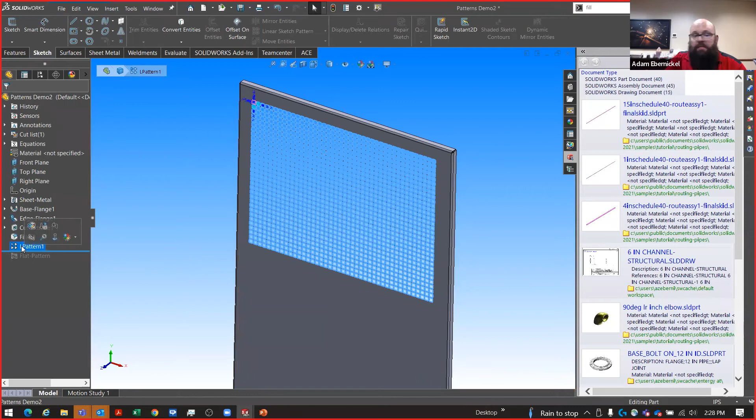Okay, so that is the geometry pattern option. If you scroll down here, you'll see a geometry pattern option. All it does is make a copy of the square - it doesn't sit there and try to cut every single square. Now, in a single part, that's probably not that big of a resource hog, but if you've got this thing six or seven assemblies deep inside something with thousands of parts, every little bit counts with file size. So we try to do everything in our power to make our jobs easier by making things as easy for the program as possible.

So we just, you know, we try to - hey, look at that, I didn't know it would come up on that screen too. Cool, let's hide that out. All right, so we do our best to try to make things a little bit faster.

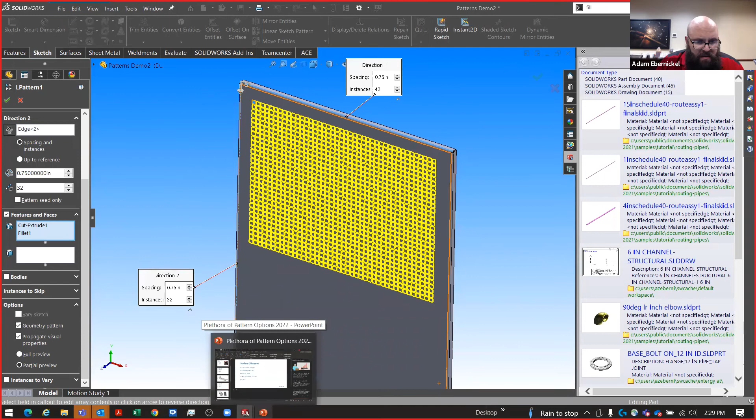Now, I do not believe I have a calculation sheet in here on this presentation, but your feature expert or assembly expert can actually go through and see live options. So we'll go ahead and do that now - we'll see what happens, and we'll jump back over to our regular pattern here.

And as you can see, it's sitting there thinking and thinking and thinking.

Now it thought. Okay, so we'll go over to our performance evaluation here, and we could see 87% of our time in that part is just on that linear pattern.

Now, 1 second doesn't seem like much, but if you have, especially at this body plant, 6 doors on one side, mirrored over to the other side you've got 12 doors total. That's an extra 12 seconds of calculation time just on a pattern of a square.

Something that's not really needed in the overall grasp of the part when you're showing a customer or even an engineer at the next level, because it really doesn't matter. All that matters is the finished product, you don't need to see it.

So what we're going to do here is minimize this down. We're going to switch it back over to geometry pattern and watch it make a liar out of me, because it's Adam's computer and it changes it. It doesn't work right, and as you saw how slow it took to calculate...

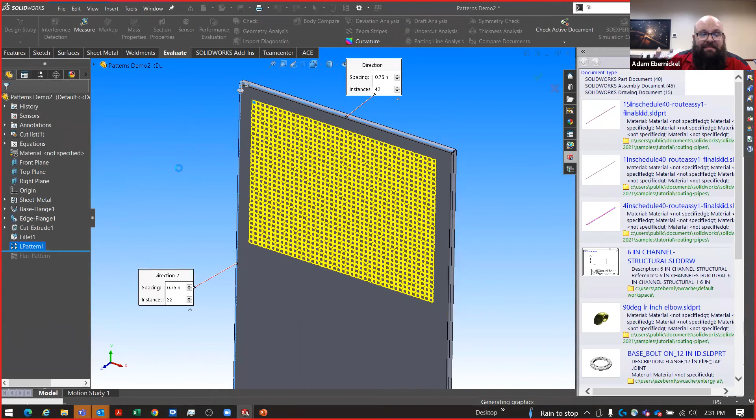All right, go back to our performance evaluation. We've dropped it down from 1 second to just a little under 1 second. Now again, doesn't seem like much for a singular part, but the more time you save, the more you make the software easier, the smaller the files are, especially if you're downloading from a...

PLM software, or a PDM, or you're emailing a file back to a supplier, it makes it a lot faster for you. It's not having to calculate the end conditions at that point, which is what the geometry pattern is for.

Did anybody notice that little button, other than the 2 super users in here? No? All right, there's sometimes you can't get stuff to pattern without using it.

Yes, that's true. And I don't know how you have this pattern set up, but I don't know if one's feeding all of them, but pattern seed only. Mhm, and that'll cost you time. Yes, also, or double it up.

Yes, so again, the question was sometimes you can't get it to pattern without the geometry pattern because it just won't do it, the software just doesn't like it. Sometimes it'll error out because of some end condition at the end of the pattern or even at the end of the cut that it's not seeing and calculating correctly. It gives you what I call the ketchup and mustard in the feature tree, which we all hate. And as a CAD admin, I hate it too.

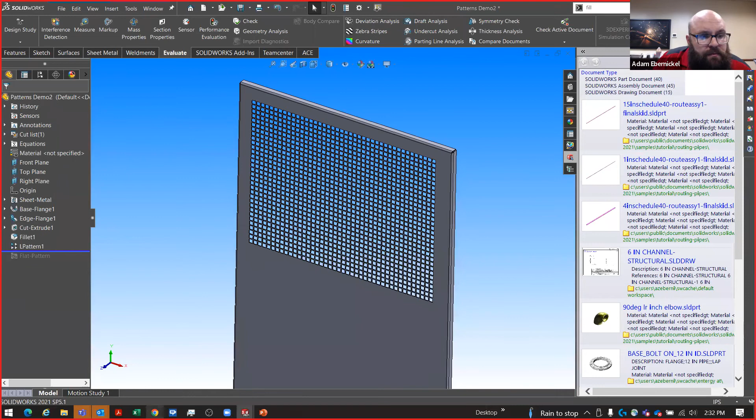So we'll pop open an example of one that will not pattern, I believe, without the geometry pattern, and let's see what we can do with it. Oh, nope, that's not it. Guess I don't have that example anymore.

No, I do not, okay, so we'll go to the next one. Again, we're kind of trying to roll through this pretty quick because I know everybody's got to get back to work. So we're going to jump up into...

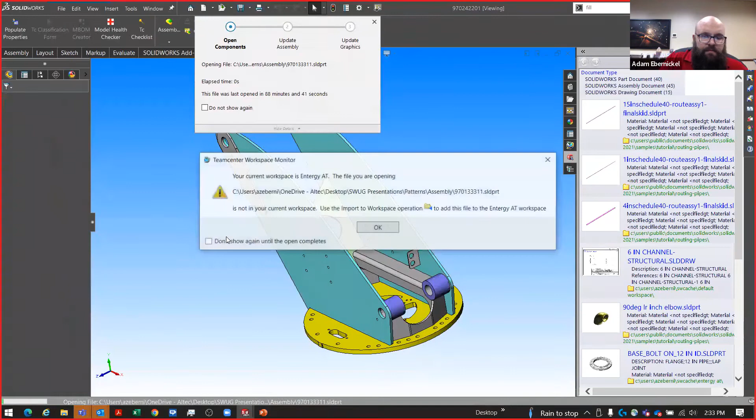Come on. Pardon my slow network speed here. All right, so we're going to use this weldment as a vary instance example.

Now this is a big piece of steel that's been welded together, and as you can see, we have a hole pattern, but the hole pattern itself is not consistent. There's some consistencies here and there, but there's not really a single derived configuration or a derived piece.

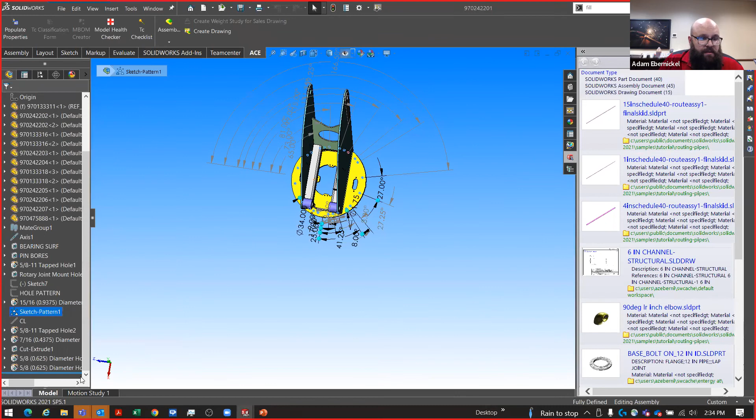So this one here was done with a sketched pattern, and as you can see, that's kind of messy. Does anybody want to do the math and try to calculate that as well? No? Okay, so what we're going to do is back that up just to kind of work through this example here.

Come on, okay, so we're going to go back over. Circular pattern.

We're going to use the outside edge as our spacing, and because this one needs 24 bolts, we're going to come in here and put 24 in there. Just to make things easy. Okay, wait, it's components.

No, wrong one, my apologies, wrong pattern. So we're going to go back over here to assembly features and do circular pattern. That's what I needed.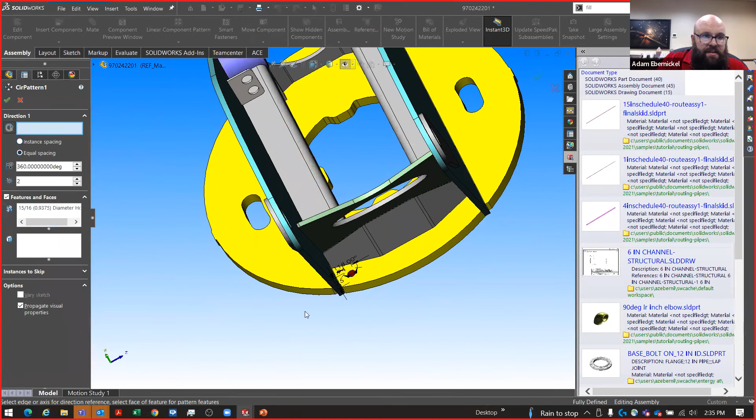So equal spacing of this diameter of this whole cutout around this base plate here. So again, we're going to put down 24.

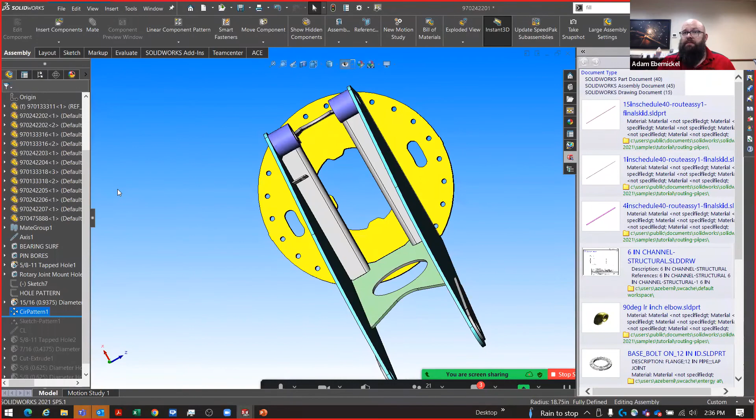So we'll see what we can do here. All right, so we got this equally spaced 24 bolt pattern here, and you can see some of these will be underneath parts and over welds, and it's generally kind of ugly looking. In our pattern here, we're going to make some changes in the option itself.

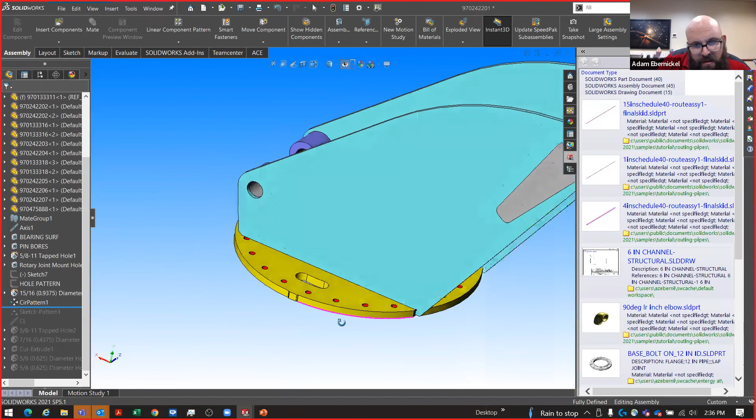Come on now, go back to equal spacing. This one's not allowing me to give the circular pattern instances to modify. Give me a second here. Oh, I know why, we'll skip that. We'll go back into our part.

Circular patterns inside of parts will not allow vary instance, but circular patterns inside of assemblies will. My apologies, I led y'all down the wrong path here for a second.

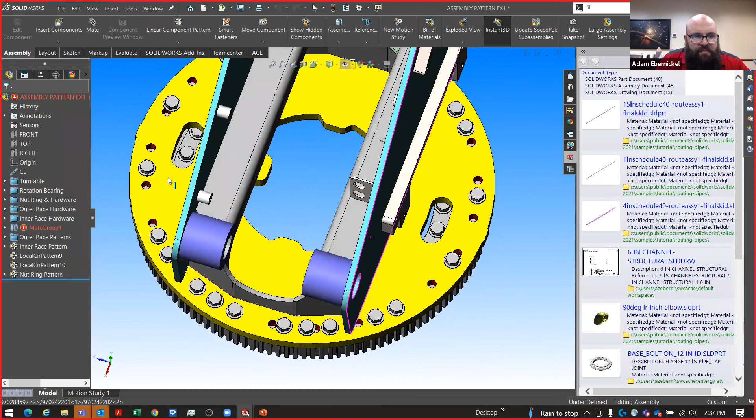Let's go back into our part here. Clicked the wrong model and ran with it. Oops, all right. As you can see, let's go back into our assembly part here, and let's suppress that back. My apologies, everyone. Jump back in, all right.

Because it actually bases the rest of the patterns, or bases the bolt pattern, off of your holes themselves. But we're going to change - we're going to suppress these up here, and we're going to work just with that first pattern.

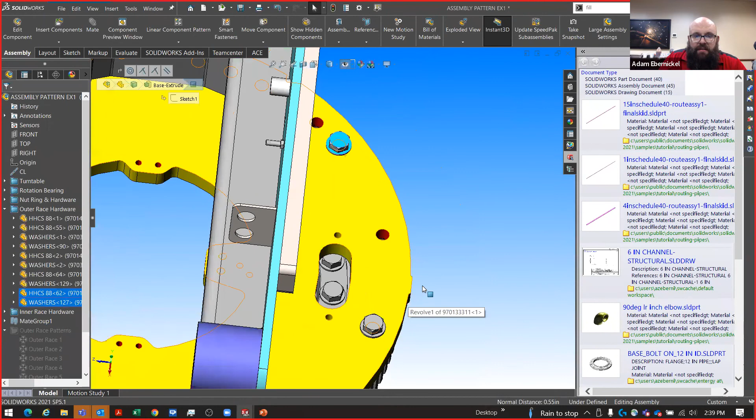As you can see, let's just go back all the way to one here. As you can see, somebody went through the trouble of putting one, two, three, four, five, half a dozen bolts almost in there to get one pattern out of here. So we're just going to go through, and as you can see, per Adam's tip, everything's in folders labeled nicely, I can find the ones I want. If I wanted to go through the feature tree, we can do that.

So we're going to suppress all these just for now. It was all wonky. Suppress all these.

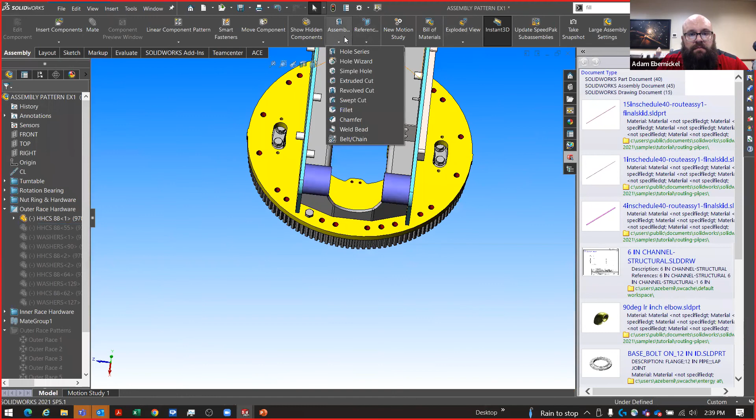All right, so we can actually do this pattern with one pattern, one circular pattern. I'm going to say this word so many times I'll be tired of saying the word pattern. Don't remind me, all right.

So we're going to go over here to our circular pattern option, circular component pattern, and we're going to equally space it around the turntable's center. And we're going to make this thing - let's do this, equal spacing. I'm going to do 24.

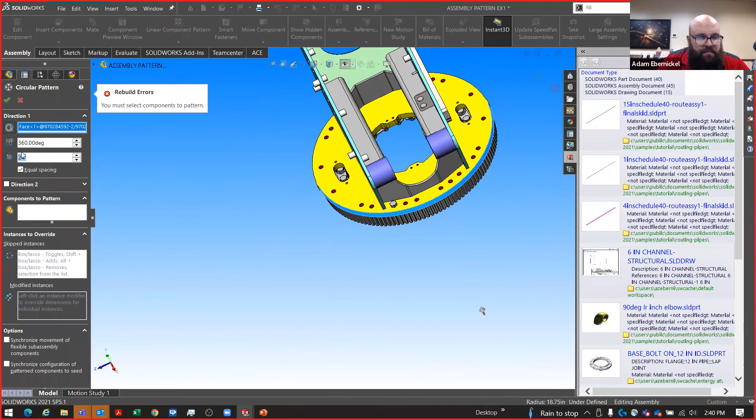So, why is this not? It's been a long day - I completely forgot to do the pattern here. So now we got this pattern of bolts.

All right, we'll go back in and we can sit here, we can go back up. And at the bottom here, there's this modified instance box. Has anybody looked at that and wondered what that is? Has anybody used it? I see two.

Okay, so we can come in here and I can come in and pick individual ones. It's kind of like the skip instance command - you can skip the ones you want to pattern, the ones you want to do. You can skip it or you can modify it. So we can come in here and modify, and we can individually move that where we need it to be. We can come back in here and do the same thing, back up the ones we need, and change one at a time if you would like.

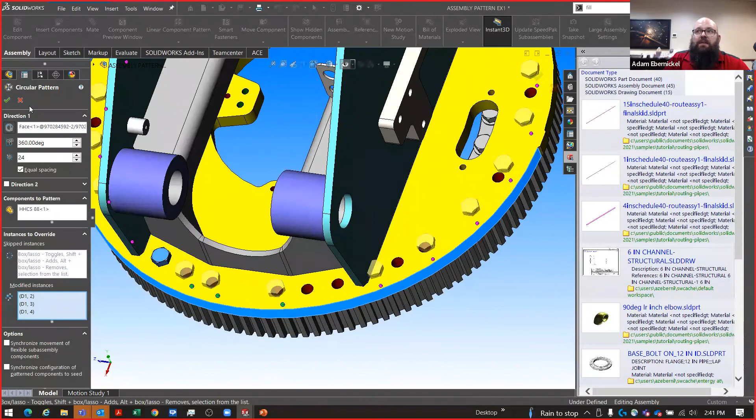In this situation, a pattern off the other feature would have been the most appropriate, but at the time I believe this model was done, I'm not sure that was part of the software, and I'm not sure how recent of a file that is.

But as you can see, I can kind of move the ones in the place that I need. So it gives you a little bit of an option to play around, shrinks your file sizes by getting the number of features down. You can do the same thing with linear patterns inside of parts as well.

So we're going to pull up a - I would think it wouldn't have to solve for as many patterns either. Yes, it would not, therefore making it more efficient as well.

Yes. How many gearheads do we have in here? Gearheads, you know, people like cars. I'm more all motorcycles. Okay, cars, motorcycles - I'm sure you all know about this camshaft, right?

A camshaft - did you see how many features it is in the tree to get all the lobes where I want them to be?

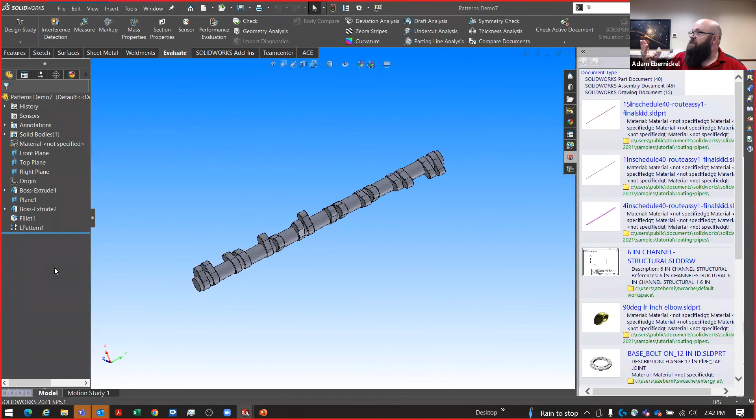Because you can modify instances not only with the length of the pattern, but also the rotation. So we can kind of do things - Too Tall Toby just did one on making a spiral staircase out of three or four features. But we can come in here and set our boss here, and we got this pattern, we got this 90-degree angle - that's our angle of orientation of the cam.

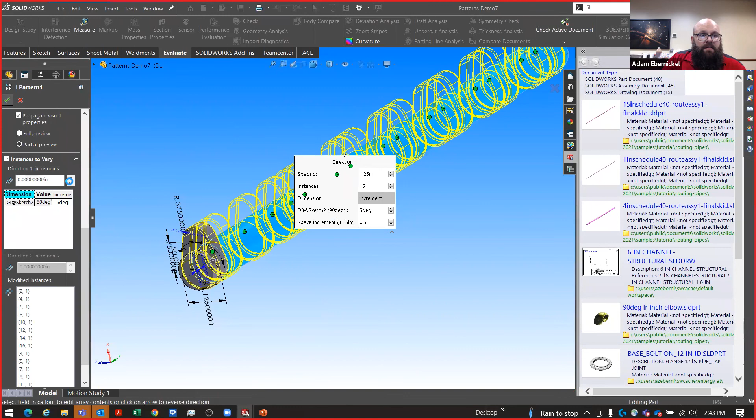So, you know, you're working at Comp Cams and you know that it's a small block Chevrolet or a big block Chevrolet, you need to space your cams out, your cam lobes differently. You can come in here and change the length of your cam lobe and just move it. So now we can come in here and we can change your angle around. We can bump it around 4 or 5 degrees and change the way it all rotates.

So this kind of gives you an idea of a little bit of flexibility inside of each pattern. You just got to learn, play around and try to implement one little thing at a time by adding buttons.

When was that added? I am not sure. That's a good question. I don't remember. I don't remember ever seeing it. Yeah. Dan, do you know when that was added? Say it again, guys. When the modified instance was added to patterns? It's within the last 5 years, I want to say. It's pretty new. Yeah. It was something that I'd never really used up until about last year when I started playing around with the pattern feature just to learn it.

I know it was after 15. Okay, after 15, Steve, thank you. So yeah, fairly, well, I say fairly recent, but it's not a 99 SolidWorks thing. That'd make me feel really dumb not knowing that it was in there. It's in the 2016 help, so it's at least that old. Okay. I think it's probably right around then. Okay, so yeah, it's been around a little bit, but like Adam said, start playing around with these things when you're doing your patterns.

So if you've got drawer patterns up and down, you want to add things. You've got different stacked drawer heights. You can change it with one pattern instead of having to pattern the same set 10 times. You can actually make one pattern and drop it. So if you have an 8-inch and then a 10-inch and a 12-inch drawer spacing, you can kind of modify it as well that way. So.